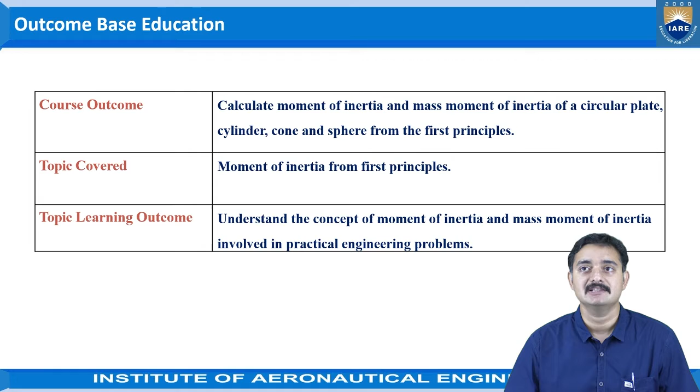In today's session, we will be learning about the moment of inertia from first principles. The course outcome of today's topic would be: calculate moment of inertia and mass moment of inertia of a circular plate, cylinder, cone, sphere from the first principles. The topic covered would be moment of inertia from the first principles, and the topic learning outcome is: understand the concept of moment of inertia and mass moment of inertia involved in practical engineering problems.

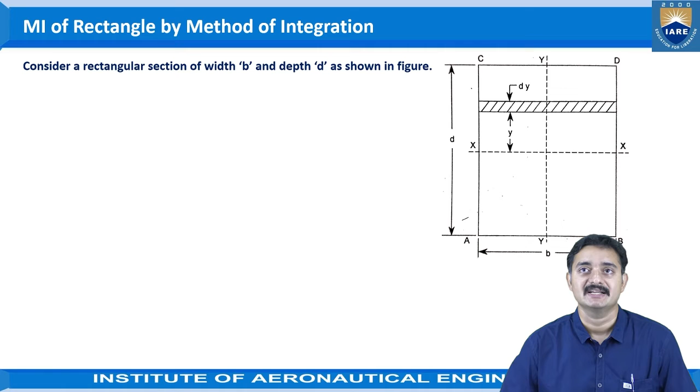First, let us see the moment of inertia of a rectangle by method of integration. This is the procedure where we will be identifying the moment of inertia of any regular shapes by using the basic principles. So, consider the rectangular section of width B, which is given here. Width of the rectangle is B and the depth is D as shown in figure. These are the dimensions given for the rectangle.

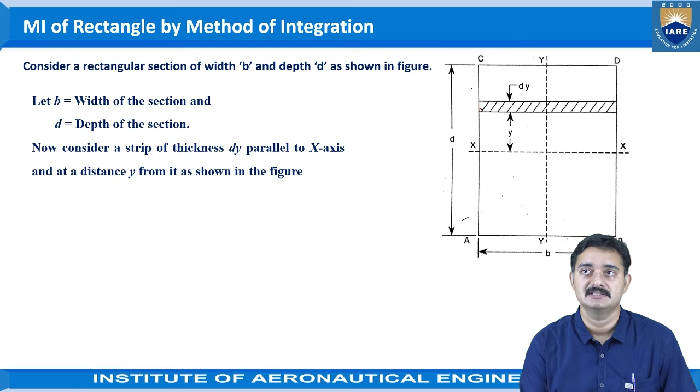Let B be the width of the section and D the depth of the section as represented here. Now consider a strip of thickness dy parallel to x-axis and at a distance of y from it as shown in the figure. The x-axis is passing through the center of the rectangle and the y-axis is passing through the center again, which is the vertical axis.

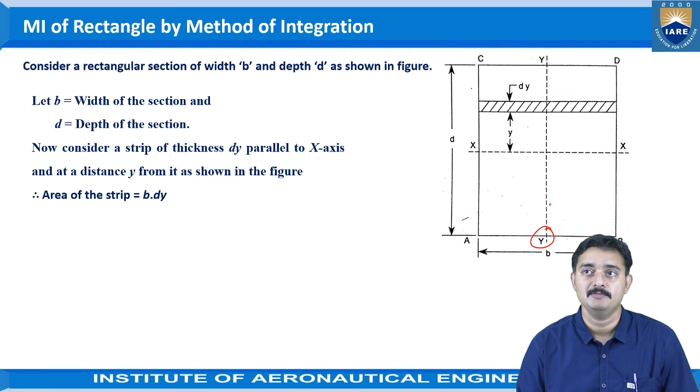Therefore, the area of the strip is given as B into dy, nothing but length into breadth. Length is taken as B and the depth is taken as dy. So, length into breadth, B into dy, would be the area of the strip.

We know that the moment of inertia of the strip about x axis is equal to area into y square, that is the distance of the object from the reference axis. So that can be written as B into dy into y square, that is equal to B y square dy. Now the moment of inertia of the whole section may be found out by integrating the above equation for the whole length of the lamina, that is from minus D by 2 to plus D by 2.

What does minus D by 2 to plus D by 2 represent? If we consider the x-axis here as the origin O, the total length of the rectangle is given as D. So the first half of D would be D by 2 and the second half would again be D by 2. If we consider this as the origin, this is the positive D by 2 and this would be the negative D by 2. That's the reason we are considering minus D by 2 to plus D by 2.

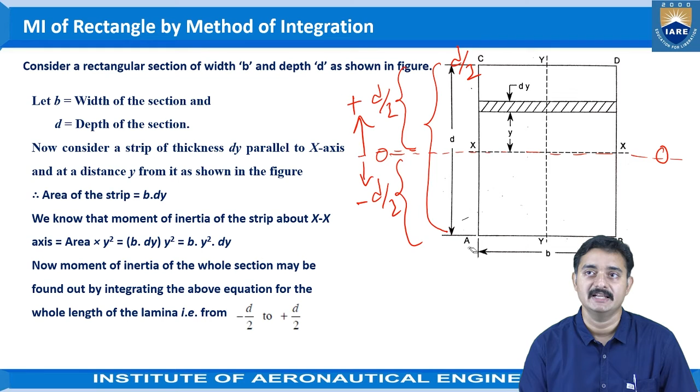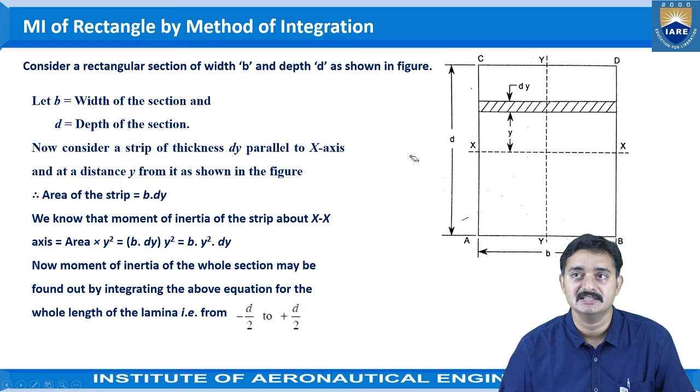If we consider the total height, then it becomes D by 2 minus minus D by 2, hence we obtain the value as total D. That's how we are considering the limits from minus D by 2 to plus D by 2 while solving the equation here.

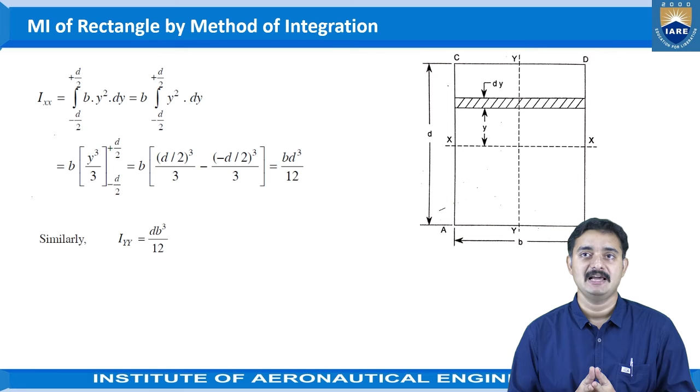Ixx, the moment of inertia of this lamina with respect to the xx axis, can be written as integral from minus D by 2 to plus D by 2 of B y square dy, that is equal to B times integral from minus D by 2 to plus D by 2 of y square dy. That can be simplified as B into y cube by 3 from minus D by 2 to D by 2, that is B into (D by 2) cube by 3 minus (minus D by 2) cube by 3. If you simplify this, you obtain BD cube by 12. Similarly, Iyy, the moment of inertia of the same lamina with respect to y-axis, is DB cube by 12.

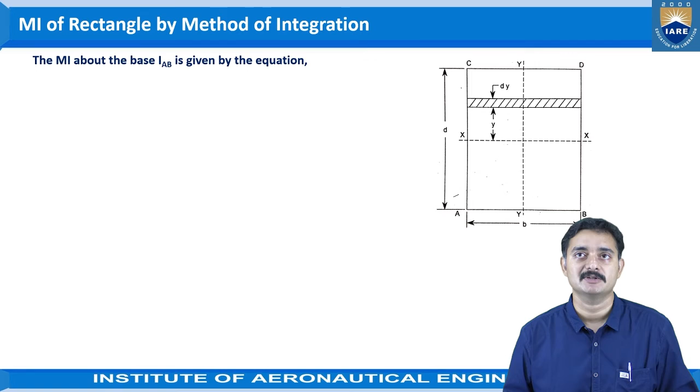Now, the moment of inertia about the base, IAB. Previously, we calculated the moment of inertia with respect to the xx axis and yy axis. Now, to identify the moment of inertia with respect to AB axis, we can apply the parallel axis theorem. So IAB can be written as Ixx, the moment of inertia of this rectangle about the xx centroidal axis, plus area of the rectangle into h square, where h is the distance of this axis to the centroidal axis.

Here Ixx is IG, the moment of inertia of section about centroidal axis, and A is the area of rectangle, that is B into D. H is the distance of center of gravity from the base, that is D by 2. Therefore, IAB is equal to BD cube by 12 plus BD into (D by 2) square, that is BD cube by 12 plus BD cube by 4, which is equal to BD cube by 3. So IAB is equal to BD cube by 3.

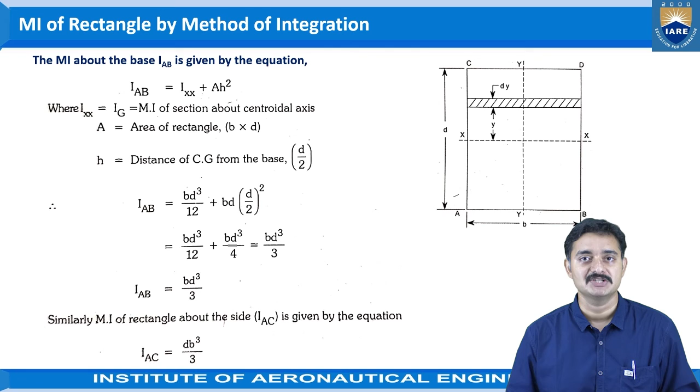Similarly, moment of inertia of rectangle about the side, IAC, is given by IAC equal to DB cube by 3. This is the moment of inertia calculation with respect to the centroidal axis as well as the side axis, where the reference axis can be considered using the parallel axis theorem. These are the basic principle methods by which we can identify the moment of inertia of any regular shapes. This concludes the session. Thank you.